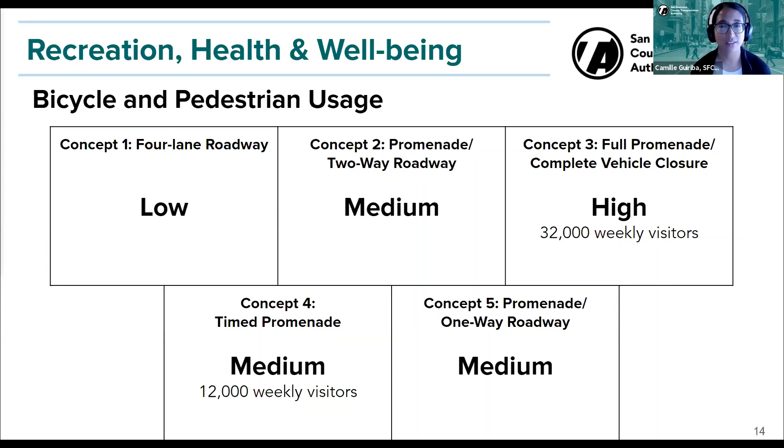Safety and achieving zero traffic deaths is another high priority for the city. We examined the number of collision reports near Great Highway and District 4 overall. These represent any reported collision, whether between two vehicles, vehicles and pedestrians, vehicles and bicyclists, or even bicyclists and pedestrians. District 4 is lucky to have low rates of traffic collisions compared to the rest of the city, while District 4 represents about 9% of the population.

The collisions in the district are about 3% of total San Francisco collisions. On the Upper Great Highway and Lower Great Highway, including La Playa, there have been very few reported collisions before and even during the pandemic, about 5 to 6 per year, and during the pandemic it stayed about the same.

Looking at the collision rate for the district overall, there was a 47% decline during the pandemic. While the data we have for Upper and Lower Great Highway is a small data set, it's important to flag that those collisions remained the same while the D4 overall numbers trended down. This could be due to a number of factors, and as you know, SFMTA is installing various mitigations under the temporary promenade, as was planned prior to the pandemic. This warrants continued monitoring.

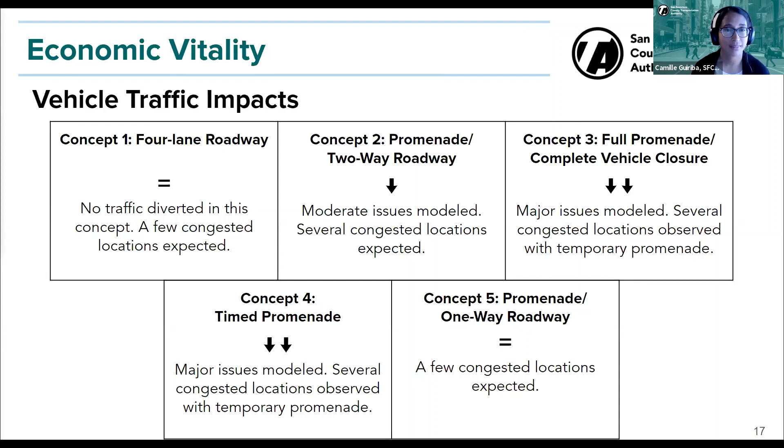So for concept 1, even prior to the pandemic and the temporary promenade, there have been known issues at a couple intersections such as Lincoln and 41st, as well as Sloat and Skyline. The Great Highway extension is planned for closure because of erosion happening on that stretch of roadway, and that means vehicles in the future will need to pass through the Sloat and Skyline intersection to access the upper Great Highway.

This is why even under concept 1, we expect some queuing at the Sloat and Skyline intersection. We also expect few traffic issues with concept 5, the one-way roadway promenade, because many of the modeled traffic problems under the full promenade concept are related to the diversion of southbound traffic, as I will show in the next slide.

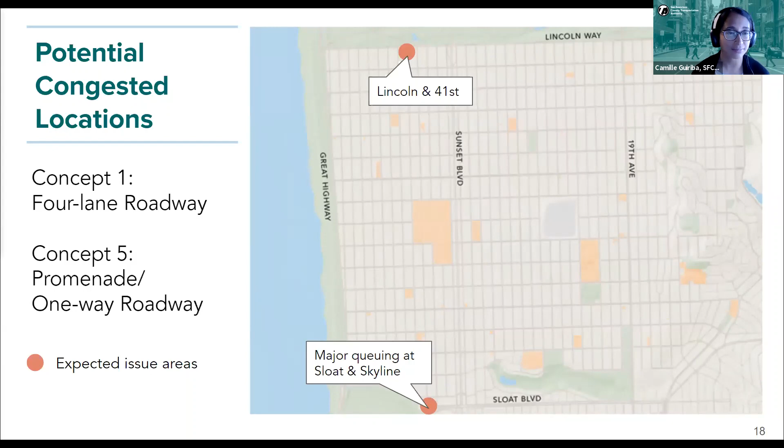When we modeled the complete vehicle closure, we found major queuing at Sloat and Skyline again, as well as southbound on Sunset approaching Sloat. This is due to the configuration of how vehicles are accessing Sloat from Sunset through a series of stop signs.

Under the temporary promenade, we've observed queuing and congestion at all the locations shown with a red dot. This includes a number of Lincoln Way intersections, as well as Chain of Lakes.

The same areas would be impacted under concept 2, the two-way roadway, but the queuing is expected to be moderate rather than major at Sloat and Skyline and Sunset and Sloat. We also acknowledge that the promenade options may contribute to traffic issues beyond District 4, such as south on Lake Merced Boulevard.

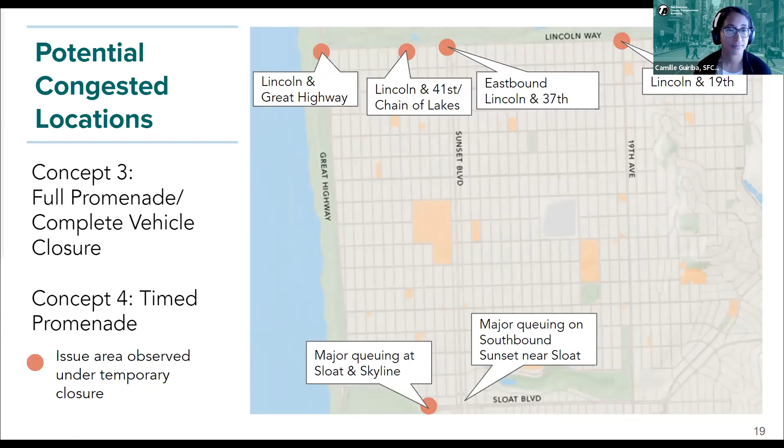As previously mentioned, vehicle congestion greatly impacts transit, and for that reason the impacts we estimate for transit are based on the congested locations shown in the previous slide. So the 29 bus is especially impacted by the different promenade concepts because of the increased traffic expected on Sunset.

There are also known existing delays on the 28 bus line that could be exacerbated by traffic being diverted to 19th Avenue. So if unmitigated, we expect the worst transit impact under the full closure concept 3 and the timed promenade when in operation. Under concepts 2 to 5, there is also potential impact to the 18 bus line if traffic is not diverted away from local residential streets.

Finally, we identified for each concept the costs associated with the Great Highway itself and nearby transportation improvements. The capital costs include changes to the roadway, traffic signal replacement, which is already needed, intersection changes at Lincoln and Great Highway as well as Sloat and Great Highway, and traffic calming and diversion on neighborhood streets, which has already been happening.

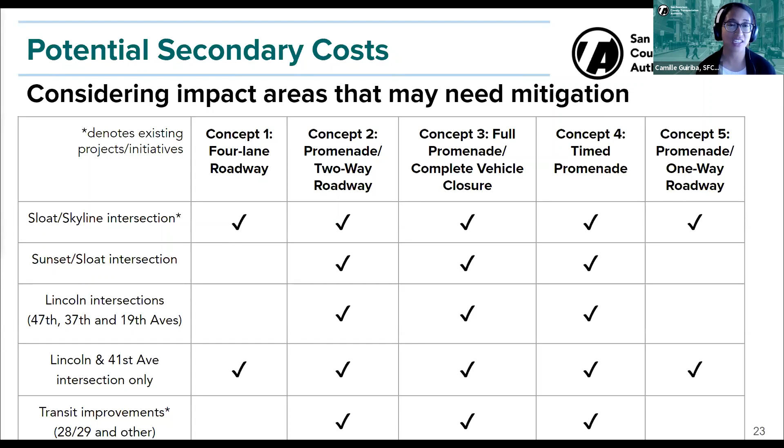In addition, SFMTA is already planning transit improvements to both the 29 and 28 bus lines, so that's already an ongoing effort. But this is to show some potential secondary costs beyond what was shown in the previous slide. These secondary mitigation measures may include traffic signal timing and coordination, transit improvements that increase frequency and prioritize transit on streets, intersection improvements or redesigns, as well as wayfinding signs and a shuttle, which is also part of the ideas we're exploring for the overall District 4 mobility study.

Now that we have a better understanding of the traffic issues under each concept, further work is needed to specify these secondary measures and mitigations to help us understand the full cost of each of the concepts.

Now I'll provide a summary of the results we received from the survey that was out in December.

During our survey period, we received nearly 4,000 responses from various parts of San Francisco. Thank you all for participating. Of the total responses, about 95% were residents of San Francisco, and we had a number of other folks taking the survey from other parts of the region.

Drilling down on the participants, 33% were residents of Sunset, in the 2 Sunset zip codes that include the outer and inner parts of the Sunset. We also had a good number of outer Richmond residents taking the survey, at about 16%.

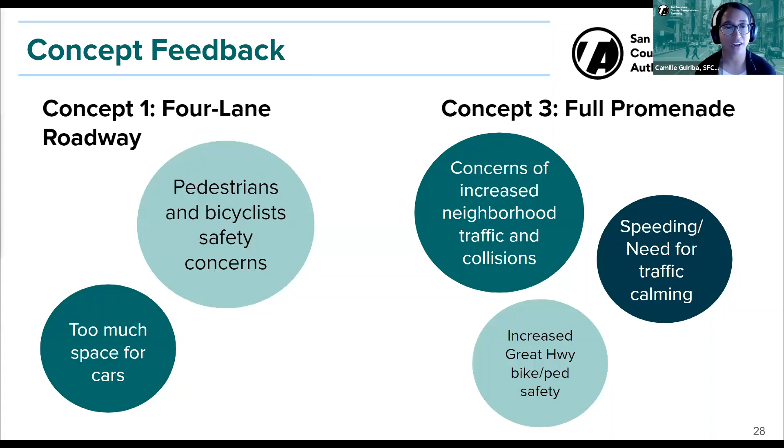As the concept evaluation shows, there are major trade-offs between the impacts and benefits of various scenarios. We are recommending elimination of concept 2 due to moderate benefit at high direct capital costs and some safety concerns. Concepts 3 and 4 have benefits as shown, but there are traffic impact and transit concerns, and we need to estimate secondary costs to better understand that trade-off.

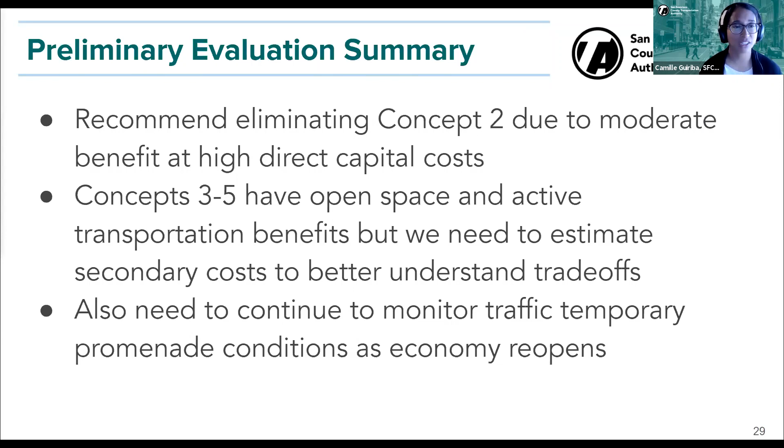We also need to continue monitoring traffic under the temporary promenade conditions as the economy reopens and congestion increases. I will show on the next slide how others at the TA have been monitoring congestion during the pandemic.

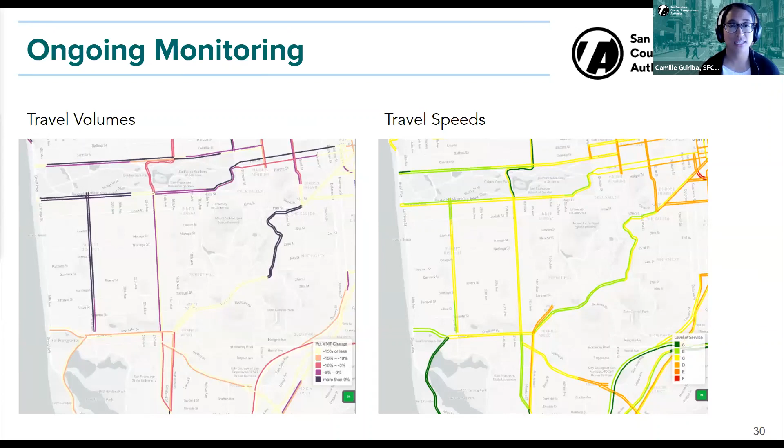And as I mentioned, SFMTA has been implementing traffic mitigation strategies and is monitoring and evaluating the effectiveness of those strategies, including speeds and volumes, especially on the lower Great Highway.

As a reminder, the Recreation and Parks Department and SFMTA are the agencies who would implement an eventual project for the future of the Great Highway. And now I will pass it on to my colleague, Brian Stokle from the Rec and Park Department, to speak more about the process as we hand off the evaluation we've done to their departments.

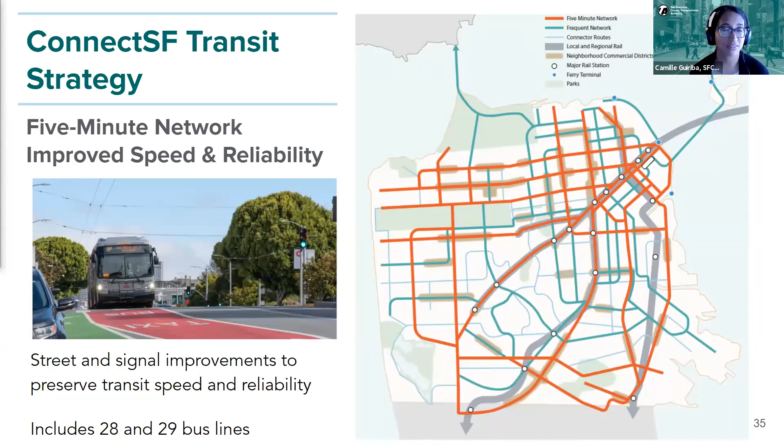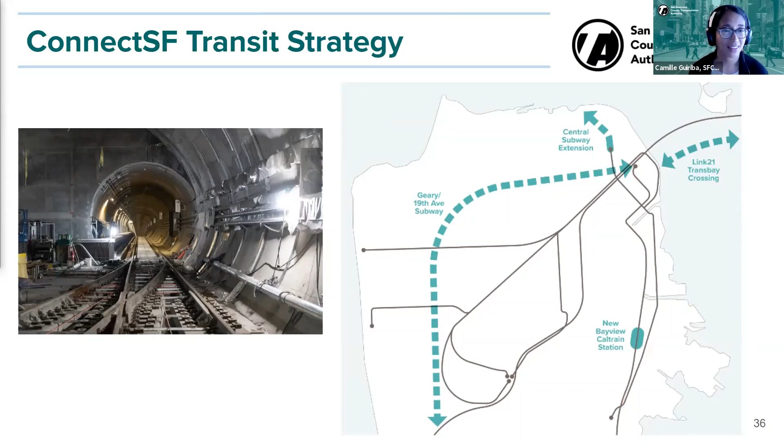For the purposes of the District 4 mobility study, we are focusing on the 28 and 29 5-minute service concept that's part of the ConnectSF transit strategy, remembering some of the data presented at the beginning of the meeting about how we're trying through the study to address improving options for folks who are driving very nearby and having other alternatives to that.

So we've taken the 28 and 29 with increased 5-minute service combined with a Peninsula Express bus service we've conceived that would serve the Richmond, the Sunset, and the Northern Peninsula, including Daly City, Colma, and South San Francisco. Thinking back to the data showing there are a lot of trips between those areas just near District 4, we tried to model what that transit service would look like together for the district.

We found that it would result in a 4.5% increase in transit trips for those trips happening to, from, and within District 4, as well as an increase in riders on the 28 and 29 that would have rapid service with that 5-minute frequency.

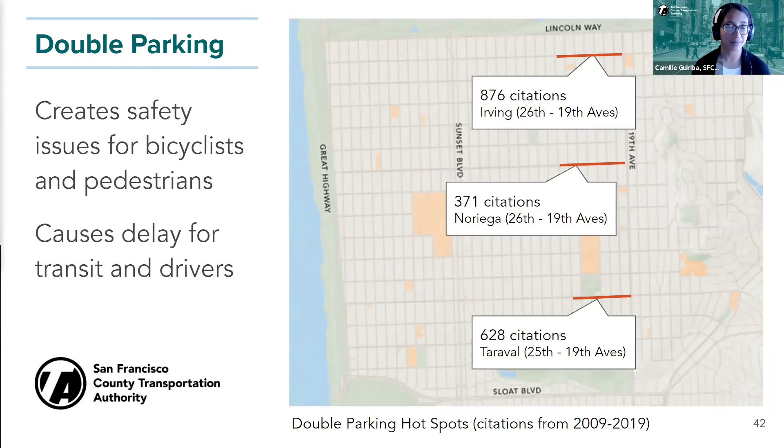MTA is considering new curbside loading zones to address the double parking issue. These proposed zones are intended for very short-term, 5-minute loading on blocks that have a lot of commercial activity. These zones would provide a place for people to pull over quickly to pick up an order at a business or drop something off in their non-commercial vehicle, rather than double parking in the street. Small business owners could also use these zones to unload goods from their vehicles, which, if they use their personal vehicle for business, is currently prohibited.

They're prohibited from using yellow loading zones without commercial plates. During the pandemic, there have been temporary versions of these zones as part of the shared spaces program, and the mayor recently announced legislation to make the shared spaces program permanent. So businesses in the future would be able to apply for a permit to have a curbside lane if that would benefit them and the street. That is the second idea we are exploring as part of the solution set related to key commercial corridors.

Now we'll get to this next audience poll about these two ideas, really trying to understand what types of connections are most important to you for a community shuttle and when that service might be useful to you. Also about how likely you would be to use a curbside loading zone if you drive, to get out of the way of transit and vehicles and support safer commercial districts in District 4.

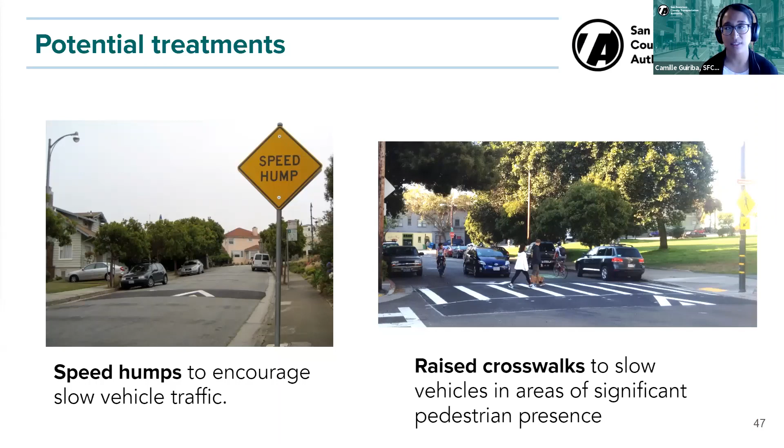So these first couple are really about helping vehicles slow down when traveling on neighborway streets. I think most people are familiar with speed humps, and they encourage slower vehicle traffic. There are different variations of these—they could be speed tables, or on the right we see a raised crosswalk where at places with pedestrian crossings, there's a raised platform so that there's increased visibility and slowing of vehicles.

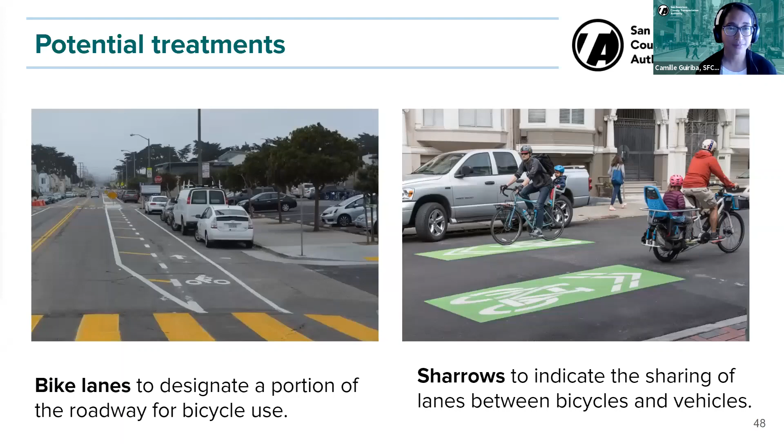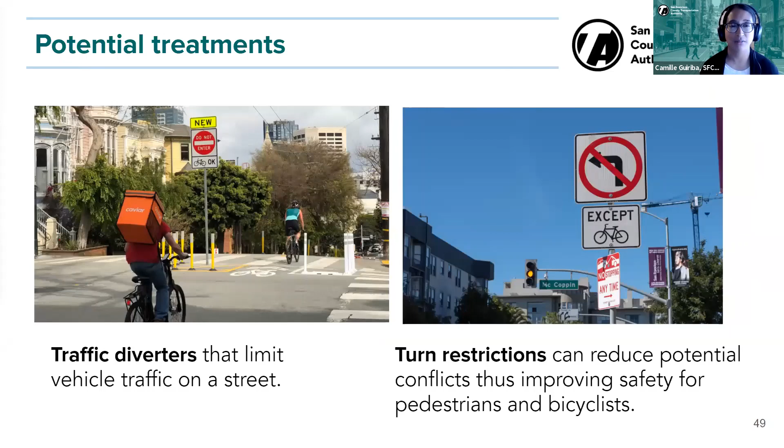The SFMTA Livable Streets folks, who we've partnered with on this solution, looked at a number of criteria for neighborways: they have to be residential streets within the jurisdiction of SFMTA, not on an existing Muni route—just trying to prevent that conflict from happening—and not on an emergency corridor or on streets that operate as one way.

The network we are considering is planned for 4 routes by 5 routes, including 20th Avenue, which has already been designated as a neighborway. So this is 4 east-west routes with 5 north-south routes.

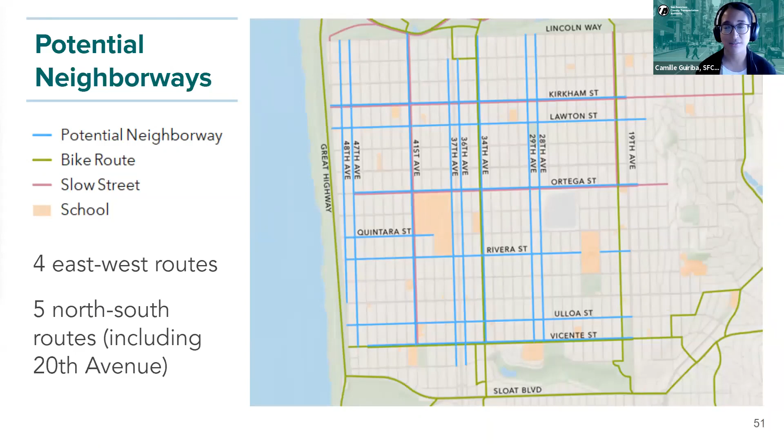The east-west streets being considered are either Kirkham or Lawton. More in the middle of the district, there's the option of Ortega. The third set would be either Quintara or Rivera. And last, Ulloa or Vicente.

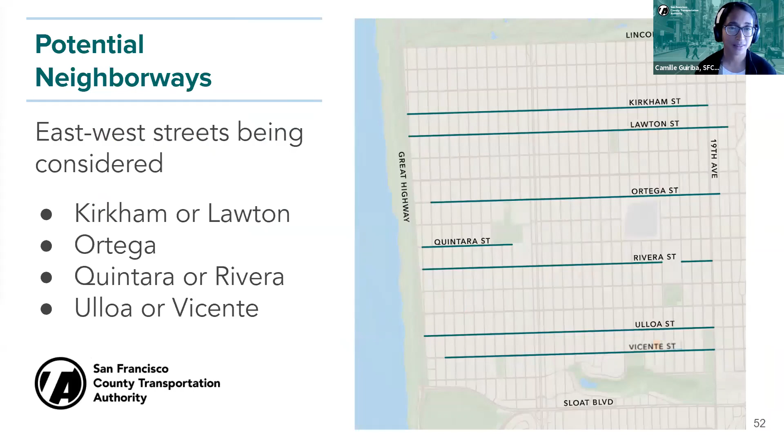For north-south streets, we are looking at 47th and 48th on the far west of the district, 41st more in the middle of the western part, then 37th, 36th, or 34th in the middle of the district, and 29th and 28th more towards the east. As a reminder, 20th is already a neighborway and would be part of the network.

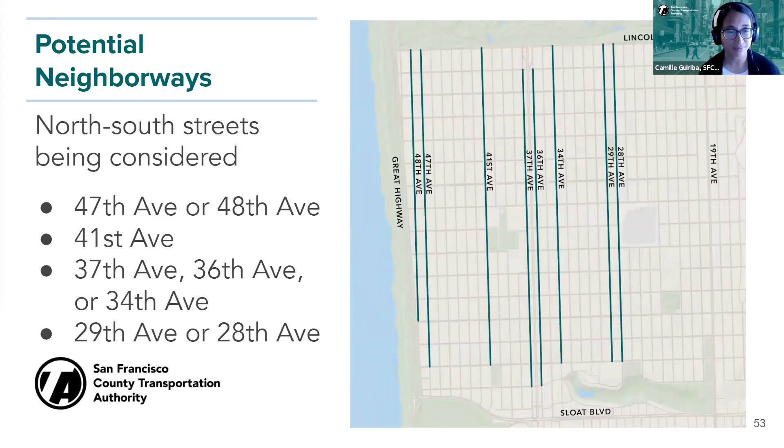Finally, separate from the District 4 mobility study, we wanted to flag that Bay Wheels bike share, the Bay Area bike share, is expanding to the Sunset and has been working to identify 7 to 10 stations to expand to in the Sunset. Their initial expansion sites are more focused on the middle and northern end of the Sunset, making connections to existing routes coming from downtown where there are existing stations and access to those bicycles. We wanted to share those potential locations in relation to the neighborway network we're considering.

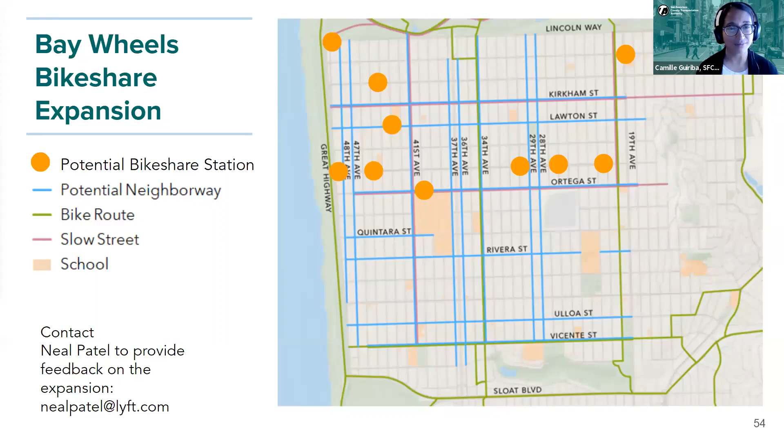Now we'll get into our next question, comment, and poll segment, really trying to understand what types of connections and destinations are most important to you for the family neighborway network.

As you're taking that poll, Hugh, if you could share any other comments and questions we've received. Sure, absolutely, and thanks everyone for continuing to provide great questions and comments. One thing I want to acknowledge—there have been a handful of questions about the data and information Camille shared. There are a lot of concerns around the data collected to support the study, and we've been trying to be really transparent about what data we have. There isn't pre-COVID data for a lot of things we're able to collect during COVID, and we recognize that as a significant limitation, which has informed some of our ideas about what needs to happen next. I just want to make sure I acknowledge that.

There are a couple questions related to whether or not there's been thoughts about providing parking for individuals who are coming to visit either Ocean Beach or a closed-to-cars Upper Great Highway. Let me just ask that question.

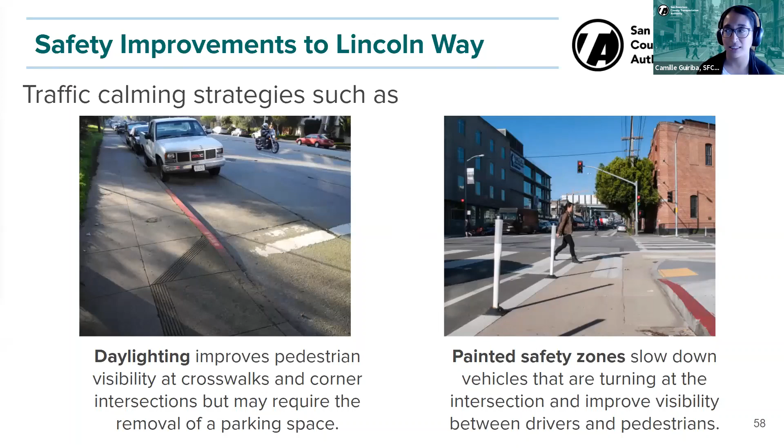Similar to that, we see painted safety zones, which have been implemented in various parts of the city. Like daylighting, they provide more visibility and also allow vehicles to make wider turns, helping prevent tight turns that might lead to pedestrian and vehicle collisions.

And getting back to the earlier point, depending on which concept advances forward with the Great Highway, we would then consider different options on Lincoln as well.

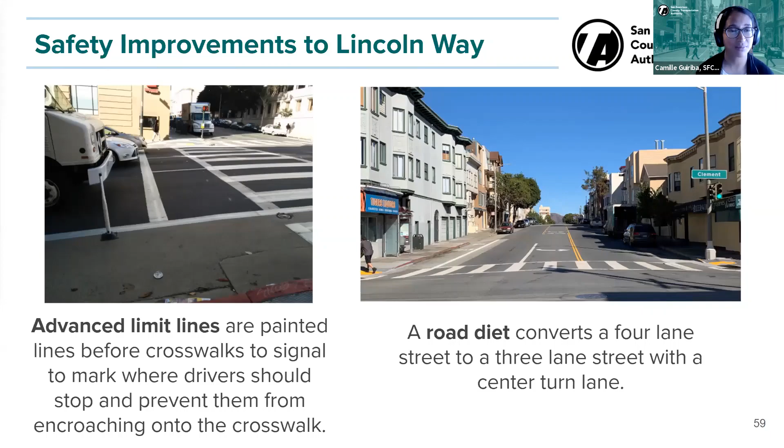We don't have a poll for this solution set, but if you want to share comments about intersections along Lincoln Way where you've experienced pedestrian or other safety issues, we'd welcome hearing about that. We can also go back and answer questions about other parts of the study we've covered so far.